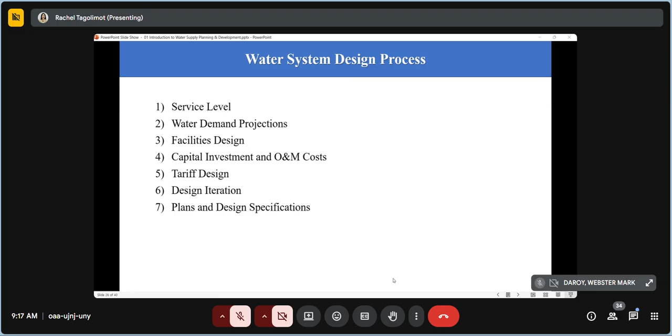Yesterday we were up to slide 26. So we'll continue now from slide 27. Okay, so here we have the design outputs. So first we have the engineer's report. So this report contains special design provisions as well as a summary of the design standards used.

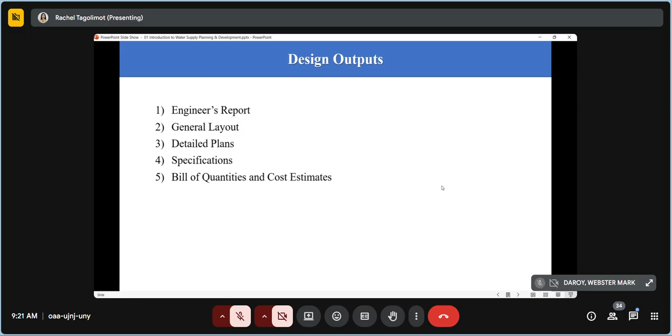Okay, so usual components of a water supply system. So very complex ang water supply systems and mag-vary na siya depende sa need or situation sa usa ka project. So as other infrastructures, every water supply system project is unique. Depende sa iyang situation. But kani akong i-present sa inyo, these are the most common ones.

So first, we have the source of water. So this refers to the place from where water is obtained. The source should be reliable and have a minimum number of impurities. It should have more charge than that of demand. So kinahanglan nga kung pila demand, way more pa ang iyahang yield para dili nato siya ma-deplete over time.

So the source may be surface or subsurface. So kung surface, mga rivers, lakes, although that's very rare in the Philippines because water treatment for surface water should be very thorough kay exposed man siya. So usually ato ang mga sources is from subsurface, gikan sa wells or spring, para minimal lang ang treatment because naay natural purification nga gakahitabo as water seeps through the soil fabric.

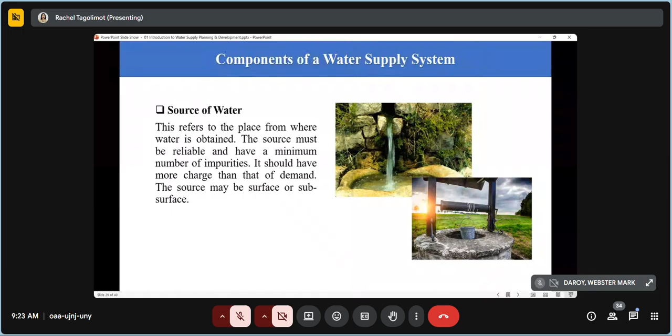So preferred gid ang groundwater, especially for rural water supply systems para mas cheap ang atong system to construct and maintain, para naman sa effect sa imuhang water bills or your tariff. So with rural water supply, we're always aiming for a system that is affordable on the part of the end users or consumers.

And then we have the intake. An intake collects the water from the source and feeds it to the transmission line. So gikan sa source, isulod sa intake ang imuhang water and from there i-transmit. The basic functions of intake are to ensure required water and reduce sediment entry, to check debris entry along with water entering and preventing the entry of ice. This one is not relatable dito sa aton. To collect water from the source and feed it to the transmission line.

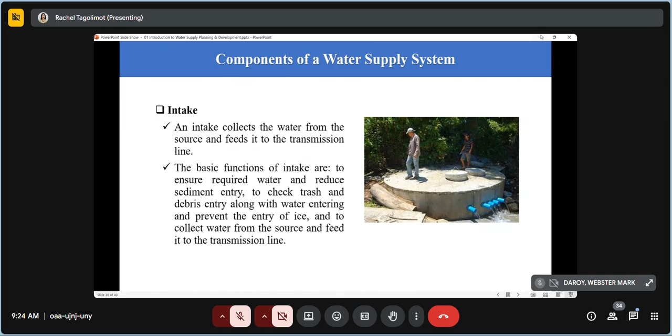And then we have the pump. So dili tanan water supply systems kinahanglan og pump. So na mga water systems na walay pump, especially for those where there is a significant difference in elevation between the source and the service area. So in that situation, most likely we will have enough hydrostatic pressure to power the water supply system. But it's not always the case. So, may mga scenario pod na same-same ra. So, for that, we will have to use a pump.

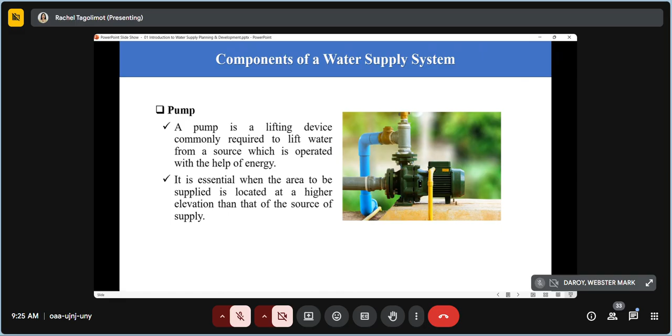So, a pump is a lifting device required to lift water from a source which is operated with the help of energy. So, kinahanglan kumbaga og boost or tuklod ang tubig. We will use a pump for that. Pero kung taas kay ang source, so kaya lang sa gravity lang. So, pwede lang nga wala siya pump. So it is essential when the area to be supplied is located at a higher elevation than that of the source of supply. And then we have the transmission mains.

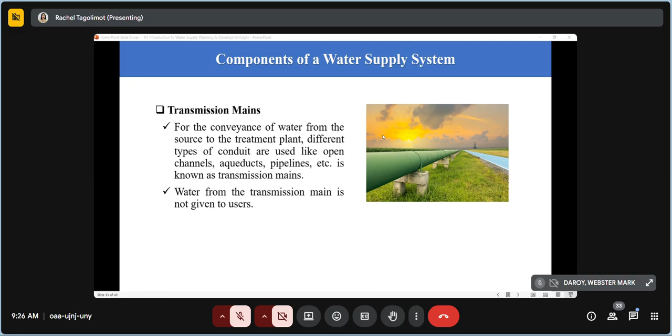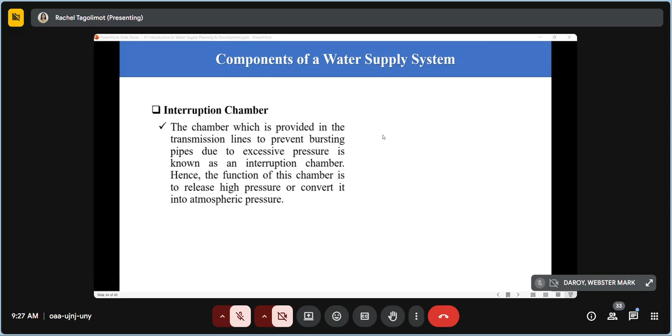Okay, so we have here the interruption chamber, the chamber which is provided in the transmission lines to prevent bursting pipes due to excessive pressure. So this is known as an interruption chamber. So its function is to release high pressure or convert it into atmospheric pressure. So this one is required in rural water supply systems so that ma-expose ang tubig sa air to relieve pressure. So that is the function of the interruption chamber.

And then we have the treatment or purification plant. The raw water contains various types of impurities. So maybe you will contest na kung gikan siya sa natural environment, ma'am, dili ba siya pure nga water? So the answer is there can still be impurities, because there are naturally occurring substances that can mix with our water. Like pinaka-common is iron, manganese.

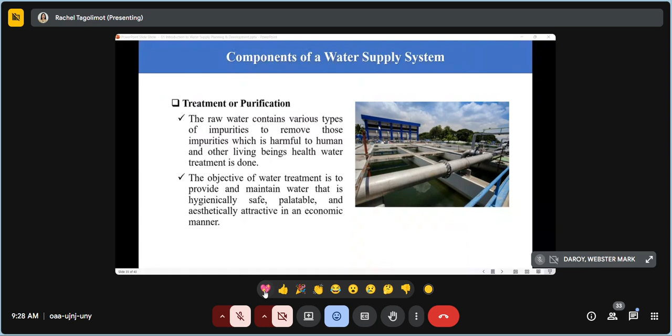So, the objective of water treatment is to provide and maintain water that is hygienically safe, palatable, meaning acceptable ang taste and odor, and aesthetically attractive. Grabe sa aesthetically attractive, pero psychology gyud na sa consumer. So, wala may individual nga gusto mo konsumo og tubig nga medyo lubog-lubog. So that is also one consideration in delivering water. Okay, so that is all for treatment or purification.

And then we have the reservoir. So this one is a common misconception because tungod kay diri sa Philippines, we always have reservoir. We think that reservoirs are a must, or kumbaga dili siya pwede nga mawala sa water supply systems. But actually, there are water supply systems that do not have reservoir. So, pwede na siya.

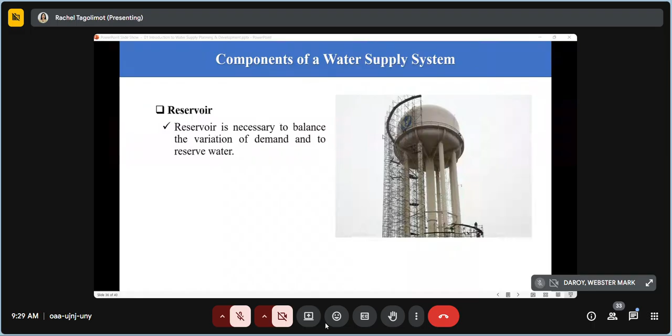And then we have the distribution system. So basically, these are the pipelines for the distribution of the water dito na sa mismo nga community. So siya na dayon ang ma-deliver for the different uses padulong sa mga residences, mga industries, commercial buildings, public use. So that is the function of the distribution system.

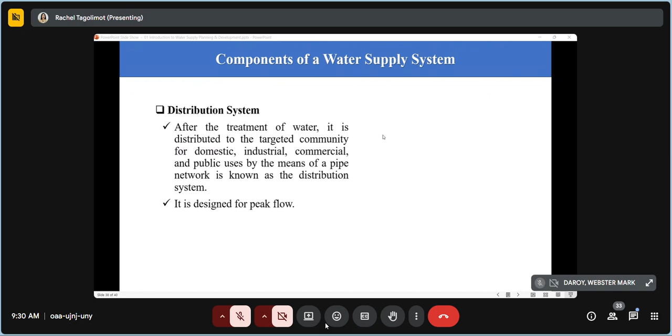Okay, so we're now on our second topic, the nature and importance of water. So, water is one of the most abundant substances on earth, and without which life is said cannot exist. So, as we know, water is one of our biological needs. There is no way for people, humans, even animals and plants to survive, let alone thrive without water.

So it covers more than 70% of the Earth's surface. So majority, sa ato ang planet is covered with water bodies, and water even exists in the air that we breathe, in the form of gas, vapor, and it is considered as a universal solvent. Tungod kay daghan og mga substances na ma-dissolve sa water. So yeah, that's why it is called a universal solvent.

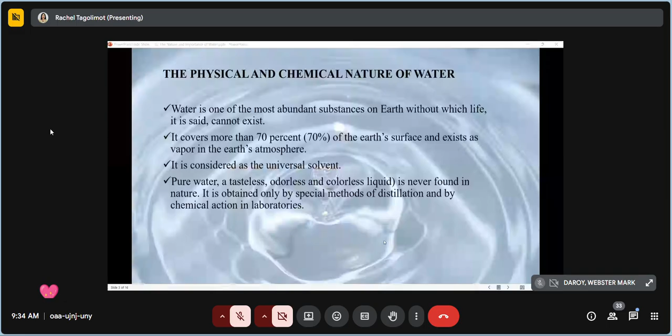So pag agi sa imuhang tubig, na mga substances dito na ma-mix sa imong tubig, and then it becomes part of our water. So it is really impossible to find pure water like 100% H2O in nature. So you still have to do methods to get distilled water. So special methods like distillation, nga kuhaon nimo katong vapor lang gid sa water and then ipa-condense siya balik. So naatara na siyang mahisgatan sa atong water treatment nga topic. So yeah, that's it for pure water. You cannot find that in nature.

Physical and chemical nature of water. So, water in liquid form is most dense at 4 degrees Celsius, and at the same temperature, pure water has a specific gravity of 1. So, basta matingala mo what is the relevance of 4 degrees. Ang mga scientists, dadto sila ni benchmarks of 4 degrees Celsius because at this point, the water is stable because water is heaviest at 4 degrees Celsius. So, you already know sa specific gravity. Ang ato ang usual basis for specific gravity is water. So that is the reason why its specific gravity is 1.

The density of pure water is constant at a particular temperature. So ang density sa water, as long as it's pure, 100% H2O, it will remain at a certain temperature. It will only change given na mag-change ang temperature. Water is the only substance on earth that exists in nature in all three physical states of matter. So we have the liquid form of water, the solid form of water, ice, and the gaseous form of water, which is vapor. So all of these three are different physical states of matter, naturally occurring sa tubig alone. So it is the only substance on earth that has that special attribute.

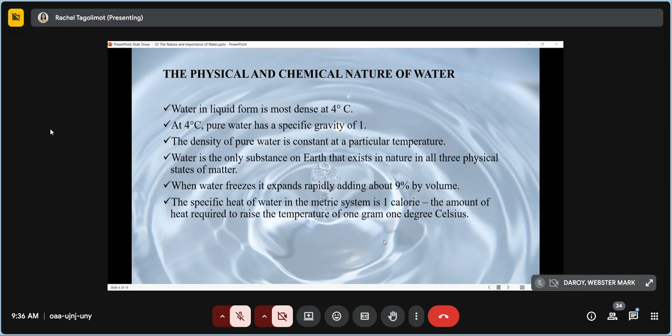When water freezes, it expands rapidly, adding about 9% by volume. So, what happens? It becomes less dense than liquid water. And that is the reason why ice floats on liquid water. And then the specific heat of water in the metric system is 1 calorie. So, specific heat, this is the energy required to heat up 1 gram of water by 1 degree Celsius. So, kinahanglan og 1 calorie. So, in comparison to other liquids, mas dako siya requirement. Kinahanglan siya sakto na amount sa heat para ma-raise iyang temperature.

And then we have here the uses and importance of water. So we have the first, the consumptive water use. So this is water removed from available supplies without return to a water resource system. So like for example, kanang water nga atong gina-consume, atong gina-drink or ginasagol nato sa ato ang mga pagkaon. So that is consumptive water use because we do not return it to a water resource system like rivers, di ba?

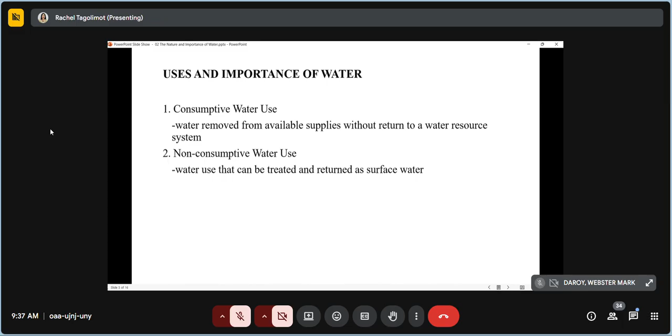And then we have the non-consumptive water uses. So this is a water use that can be treated and returned as surface water. So example for this is the industrial use. Usually sa mga factories, they use water for cleaning. So after using the water, it becomes wastewater. So i-treat lang nila and then ibalik nila sa atong bodies of water. So that is an example of non-consumptive water use.

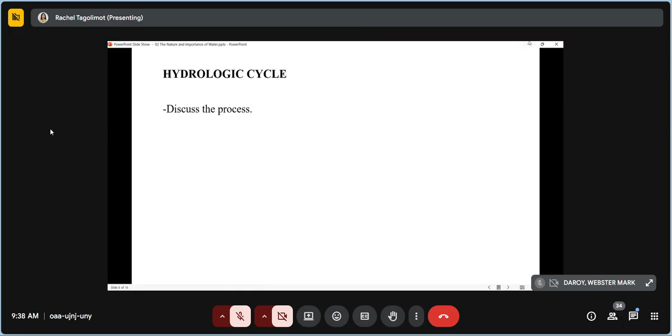So mag-quick recap lang to sa hydrologic cycle because this is also covered by water supply system.

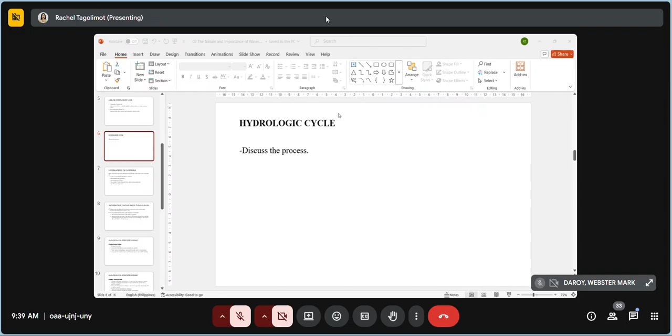Hydrology. So, okay, so masegue lang ta kadjot sa hydrologic cycle na. Just a quick recap. So I know you have just taken your hydrology.

So as you already know, kanang water nga imong inom sa imuhang water bottle, that is water that's been here for millions, even billions of years. And we do not know kanang imong giinom gikan pa din na sa naulan din na before sa Pyramid of Egypt, or was it once part of the blood of an animal na wala na karon, like mammoths, dinosaurs, singot baka siya sa dinosaur before?

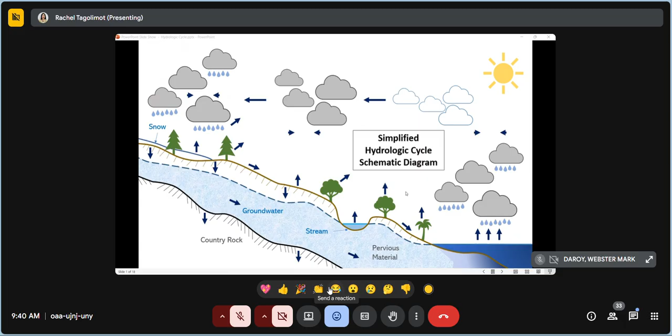We really don't know, because water is not truly lost actually. So even if we consume it, mubalik ra magagyapon siya sa environment. So kaning water nga atong kakita karon is really historical because more magigyapon ng tubig sa una, gi-cycle lang yun siya. So that is the very core of the hydrologic cycle. Ang atong tubig, it's never truly lost. So convert lang siya through different hydrologic processes.

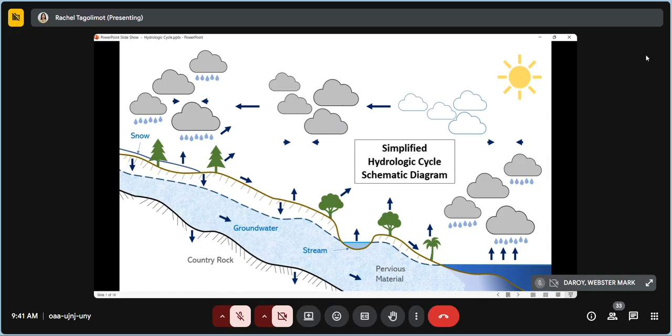So here we will be discussing about the hydrologic cycle. So hydrologic cycle is the cycle that the water in our planet goes through. So it is endless and it has no beginning nor end. So it doesn't really have a starting point, but for the sake of discussion, usually mag-start siya sa evaporation. But actually wala gyud siya starting point, and all of these hydrologic processes can happen at the same time. So unsa man ni, naka-animate man ni.

Okay, so for the sake of discussion, we'll just start with evaporation. So, water evaporates from oceans, streams, soil moisture, and snow due to the heat provided by solar radiation. So, the main catalyst for the hydrologic cycle is our source of life, the sun. So, it is the sun that triggers the hydrologic cycle due to the process of evaporation. So, once nga ang water ma-expose gani siya sa source of energy, source of heat, like the sun, it converts into its gaseous form. We call it vapor. So vapor is less dense than our natural air.

So magtak ang tubig and then ug mo boil na gani siya, di ka kakitag steam nga padulong sa taas. It's because vapor or the gaseous form of water is less dense than the natural air. So from your fluid mechanics, it will really rise up. So less dense nga fluids musaka and then musettle pod ang denser na mga fluids. So due to that, ang vapor musaka sa atong atmosphere. So that is the process of evaporation, ang pag-convert sa liquid water into gaseous form.

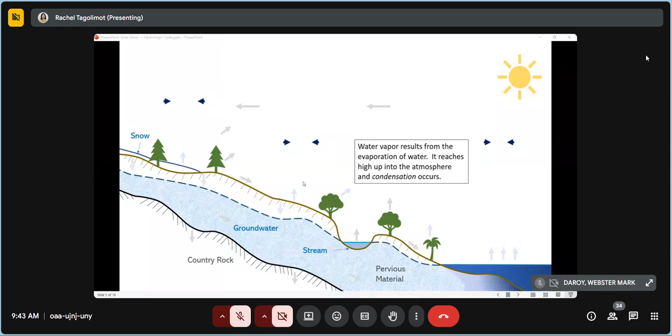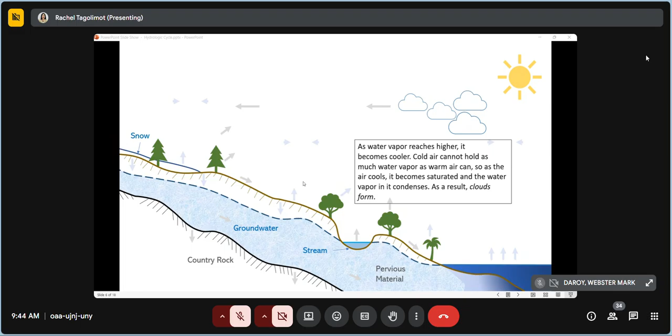And then as water vapor reaches higher, it becomes cooler. And cold air cannot hold as much water vapor as warm air can. So as the air cools, it becomes saturated. So pagka-saturate niya, it condenses and then clouds form. So while much of the clouds remain above the oceans, a part of them are transported to the land areas by the wind. So kaning pag move sa clouds sa atong vapor nga na-form sa taas through the action of the wind, this is what we call the hydrologic process of transportation.

So that is the reason why much of our vapor was generated from oceans and huge bodies of water, but we still experience mga heavy nga rainfall or precipitation in a landmass because they are carried by the wind pasulod inland. And then, when the air can no longer hold all the condensed water vapor, excess amounts precipitate or change from gas to liquid. So, of course, from your hydrology, the conditions na kinahanglan para mo precipitate siya. So, once na ma-meet tong mga conditions, mobalik na dayon ang water padulong sa ground.

Now, raindrops may evaporate back into the atmosphere even when falling. So, it is possible for evaporation and precipitation to happen at the same time. And then another part may be intercepted by vegetation, structures, and other such surface modifications. So, interception is when water cannot go back to the ground because there is some sort of obstruction, like surface modifications like mga pavements, airports, basta mga concreted areas, and even mga dense nga vegetation like kanang sa mga rainforest can also act as interceptors.

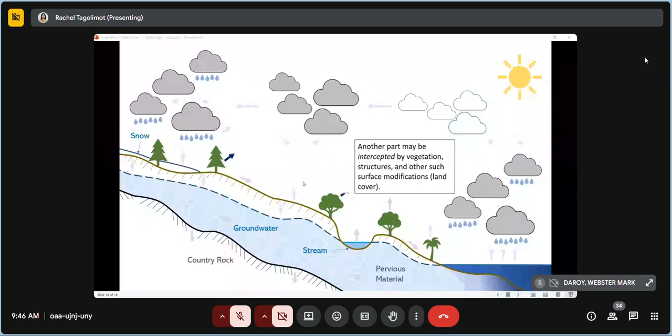Water that reaches the ground enters the earth's surface through infiltration, which enhances the moisture content of the soil. So infiltration is when water enters the ground. So this is the hydrologic process that supports our flora, no? Atong mga vegetations, mga plants, atong mga trees, mga forests. So this is the hydrologic process that is very crucial for these living things.

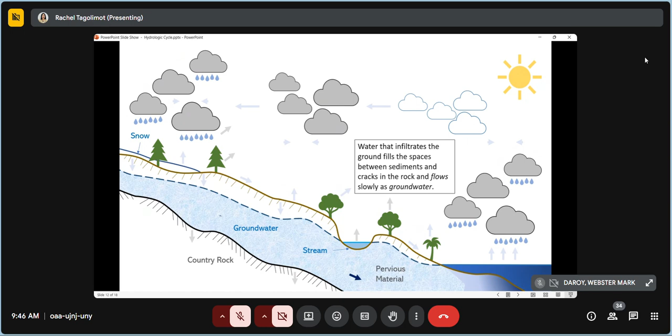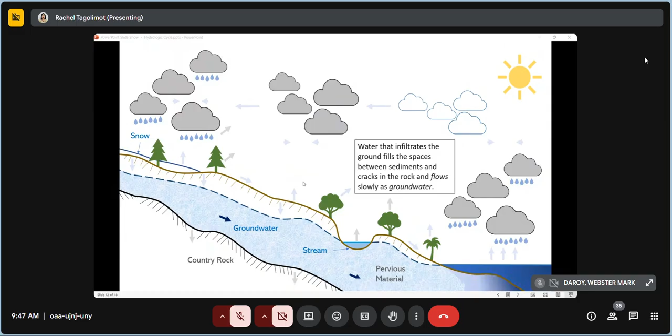And then water that infiltrates the ground fills the spaces between sediments and cracks in the rock and flows slowly as groundwater. So na din tayo ginatawag na groundwater. So this is the water storage underneath the ground, and groundwater is dynamic, meaning it flows, no? And this is due to the action of gravity, of course. But of course, it is way slower than a stream flow, tungod kay na may obstruction in the form of the soil fabric. So water has to seep through the voids. So mana siya nga slower gyud ang movement sa groundwater, but there is movement.

The precipitation reaching the ground surface after meeting the needs of infiltration and evaporation moves down the natural slope over the surface and through a network of gullies, streams, and rivers to reach the ocean. The groundwater may come to the surface through springs. So springs are natural na mga formations, no? Well, dili na sila man-made. So they are just really a work of nature, and other outlets. So sa high ma-access na tong groundwater kung mag-construct tag well, that is already man-made, but springs are natural.

The portion of the precipitation by which a variety of paths above and below the surface of the earth reaches the stream channels is called runoff. So water that flows, we call that runoff, no? But specifically for water that flows over land, that is surface runoff. But runoff can still happen below the ground because groundwater flows. That is also runoff. But when we say surface runoff, that is specific for water that flows over the surface. So once may mo na po siyang parts sa stream, so rivers, brooks, it becomes stream flow.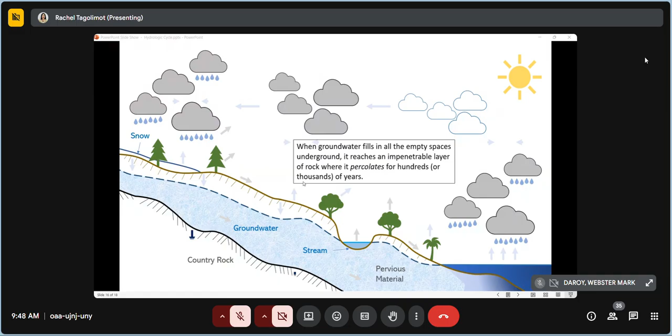When groundwater fills in all the empty spaces underground, it reaches an impenetrable layer of rock where it percolates for hundreds or even thousands of years before din siya mo resurface. So, mastora na siya dadto.

Vegetation sends a portion of the water from under the ground surface back to the atmosphere through the process of transpiration. So, apil ang ato ang flora na gyapon sila role sa hydrologic process because they also emit water from their leaves. So before, ang mga scientists, dili nila ni gina-consider. So na sila kakakita ng mga errors sa ilahang estimation sa water balance. And then from case studies, from research, na kita na tungod day sa transpiration. Kay significant di ay ang role sa transpiration, significant gihapon na volume ang undergo sa process of transpiration. So it really has to be considered. So karon, gina-consider na siya alongside evaporation.

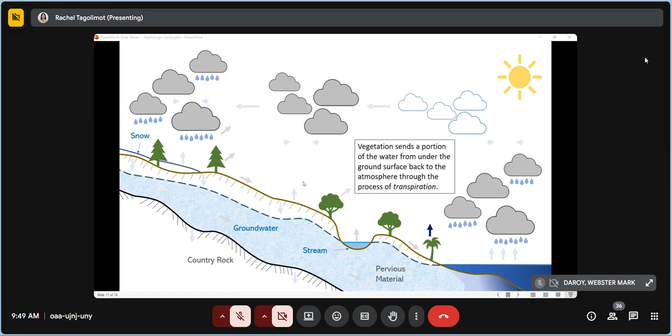Yeah, so that's it for hydrologic cycle. So now you know, no, that water is really historical. So every time nga mo inom ka sa imong tubig, that is water that carries background or stories, no? Billions of years in the making, a history and nga tubig. So it's very amazing.

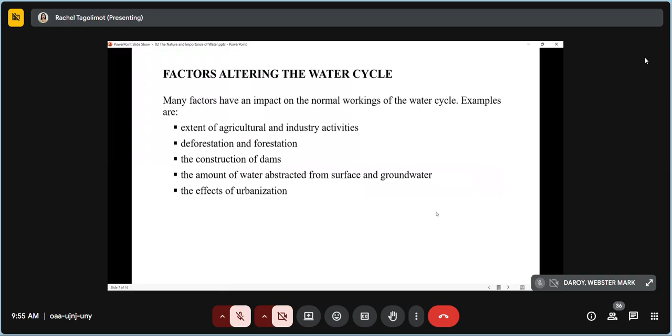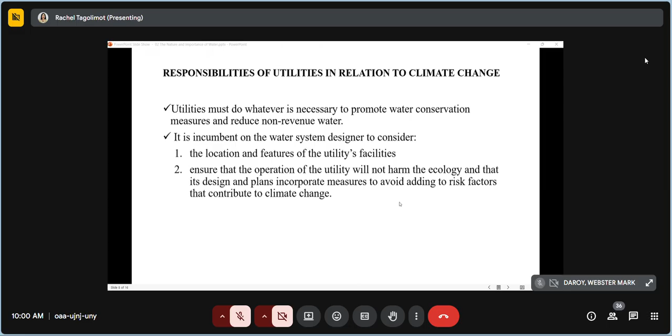You may not feel it now as students, but there will come a time when you will be in leading positions and given the power to decide on things. I hope that when the time comes, you won't trade off the environment for the sake of development. There are ways it can be done, a balance between the two.

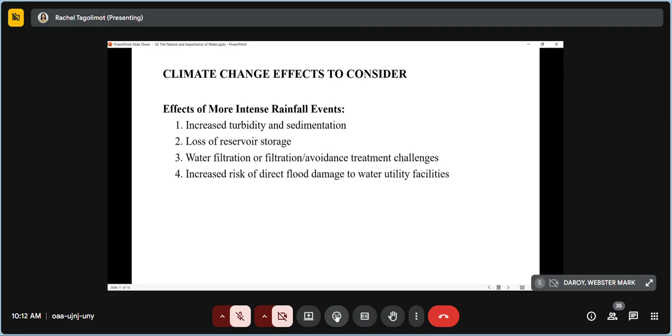And then reduce non-revenue water. So as much as possible, we repair leakages, pipe burstings immediately or as quick as possible, ma-repair gid siya to reduce non-revenue water. And then monitoring, no, to prevent water theft. Demand management through tariff design.

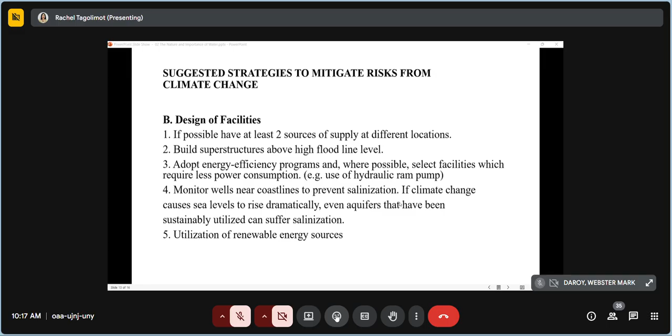Utilization of renewable energy sources. So if it's possible for you to use, ang pinakadali ra gid is solar, no? So if you can incorporate solar energy source sa inyong water supply system, then do so. That is very good for our environment.